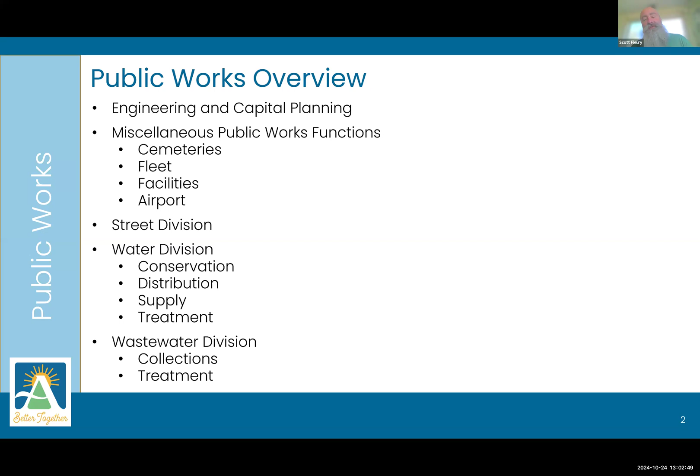So the first thing I wanted to talk about was engineering and support and planning and project development. One of the primary functions outside of budgeting that Public Works does in the engineering group is develop projects through master planning for the enterprise funds themselves.

So each enterprise—water, storm drain, streets, wastewater, even facilities—has a master plan, which is a guiding document. The master plan sets level of services. It sets goals and objectives for that enterprise or utility. It does a capital plan, provides components of maintenance for the system. It does a financial forecast for that enterprise as part of that. And how the city typically does master planning is the city council appoints a citizen community member group to work with staff and a consultant team to develop the plan itself.

So I'll give an example. In 2010, the city council appointed about a 10 to 12 member, I believe it was, Ashland Water Advisory Committee citizen group that worked on the 2012 water master plan. They worked from about 2010 to 2012, so almost a 2-year period, with consultant staff and city staff to develop that master plan, which then goes before the city council, and the city council reviews that master plan and finally adopts it.

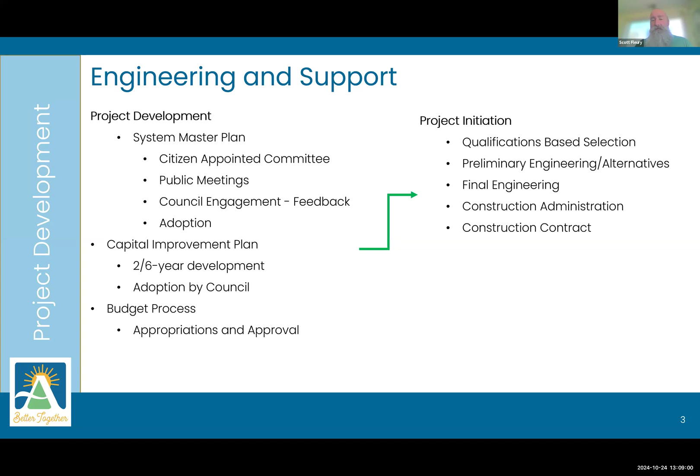So that's kind of the function of engineering overall for the city. It's one of the divisions in Public Works.

Now, some of the miscellaneous functions that Public Works does: we manage and maintain 3 historic cemeteries. The state has rules in place for how you maintain and take care of historic cemeteries. Public Works is also in charge of the fleet, so we maintain all of the equipment and all of the vehicles for the city itself.

One of the policy focuses over the last decade or so has been what's called a greening of the fleet. The city has been moving forward with electrification of its vehicles and some of its small equipment. Chainsaws, leaf blowers, lawnmowers and things like that have slowly become electrified and will continue to do so. Same with light duty pickup trucks and staff vehicles becoming electric or plug-in hybrid. That's been one of the policy directives of the city council.

Public Works also maintains all the occupied and unoccupied facilities for the city operationally. That's the community development building, City Hall, Briscoe School, the Civic Center, Grove, Police Station, 90 North Mountain, where Public Works and Electric, IT, and AFN are located. All of those city facilities are taken care of from a maintenance standpoint and also a custodial standpoint by city staff.

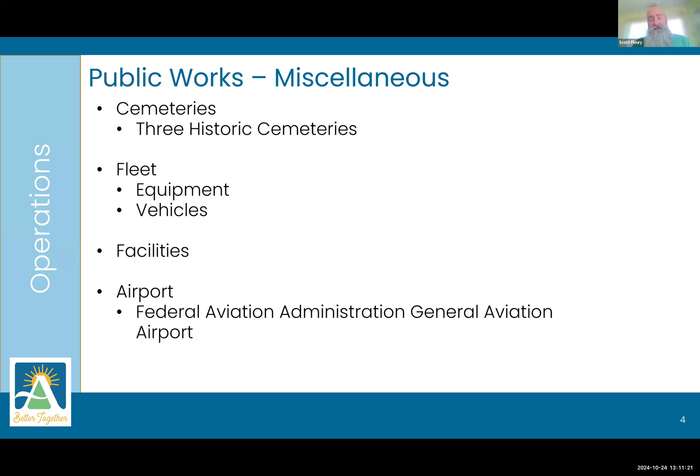The street division is obligated to maintain things within the public right-of-way. In most circumstances, that means things from curb line to curb line. When you leave the curb line and get into the park row landscape strip area and the sidewalk, per municipal code, that is the requirement of the adjacent property owner to maintain.

One of the primary focuses for street operations is pavement preservation. This includes going out and inspecting the roadways on a cyclical basis and developing what's called a pavement condition index, a rating of the condition of the roadway. They use that index to develop a strategy on what roads require what level of maintenance and when, so we always have an ongoing maintenance cycle of activities.

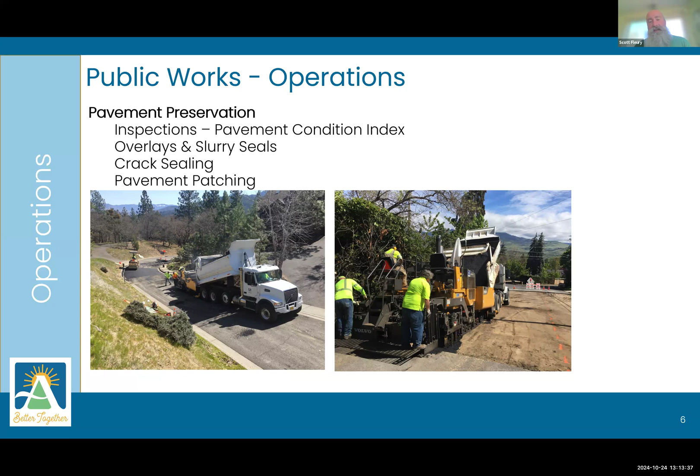Paving operations are seasonally dependent. These are things we do during the warmest part of the year because you need good weather to lay down pavement materials.

The other thing the street department does is a bunch of catch-all work. They do vegetation management. So if there are complaints about vision clearance at an intersection, like a tree blocking a stop sign, they go out on a code compliance related call and request the adjacent property owner, or do it themselves, maintain that vegetation so you have unobstructed views of intersections and signage.

They go out and repair potholes. They work with the police department and other agencies on special events doing traffic control. For all of the parades, they help assist and develop the traffic control and implement that.

They do all of the signage and striping markings throughout the city. In the city, there's well over 300 crosswalks, 30 plus miles of lane markings, and 100 to 200 plus miles of actual travel lanes, all of which need to be maintained with signage, striping, and marking.

When the winter season hits, they go out and snowplow the roads. We have a street sweeper that runs almost every day annually, and in fall when the trees start to leaf out, we run 2 sweepers most of the time to keep that debris out of the storm drain system primarily.

They also do grading on some of our unimproved roadways, roadways that aren't paved right now. They go out and grade and clean those up annually as needed.

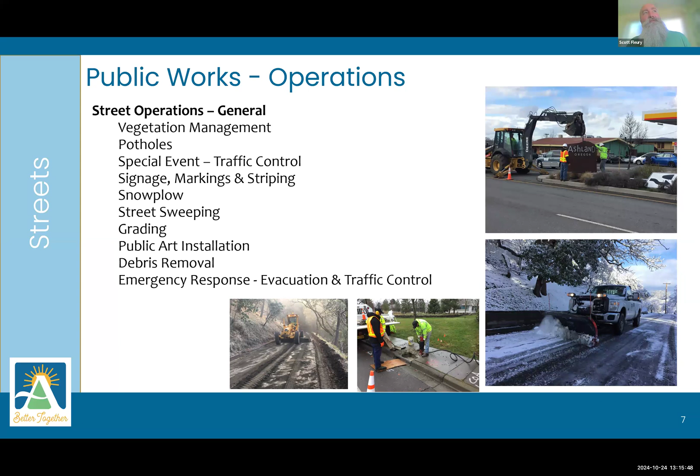Those are the primary functions of the street department for the city overall.

Now, the water system is broken up into 4 distinct divisions. And here's some drone footage.

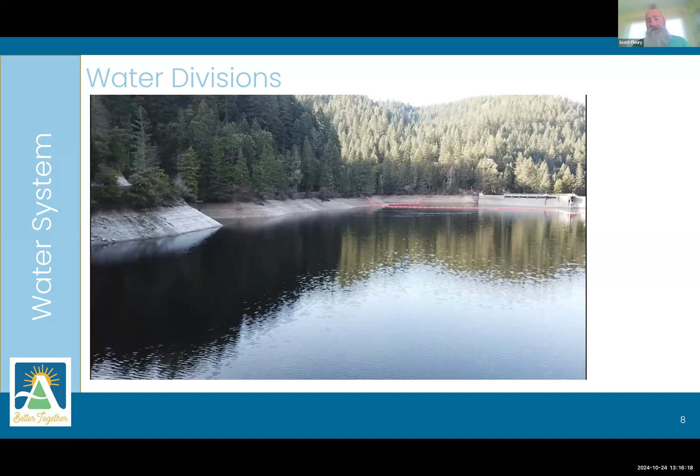This is Reeder Reservoir, the city's raw water storage reservoir, impounded by Hosler Dam. It's a little over 800 acre-feet of storage, about 280 million gallons that can be stored. The reservoir is fed by the east and west forks of Ashland Creek, and the Mount Ashland watershed feeds that through returning flows and also snowpack and snow melt.

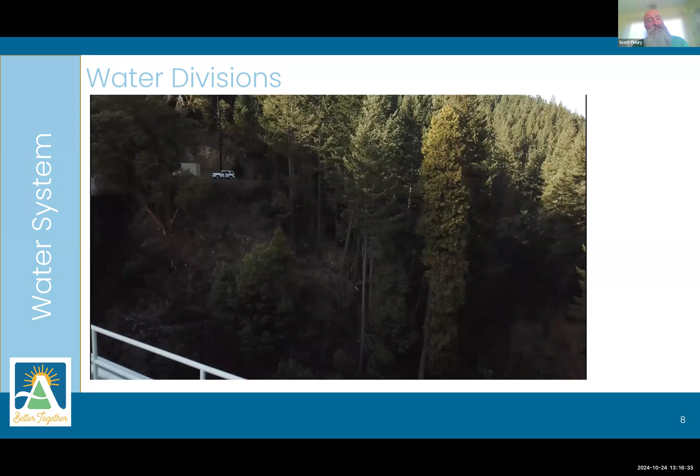This is Hosler Dam. It was constructed in 1928 and into 1929, when the reservoir was filled. It's 575 feet long at the crest and about 114 feet tall overall. A lot of people don't get to see it, but it's a pretty amazing place up there in the reservoir, so I like to show this video just so people get a scope and scale of what it looks like.

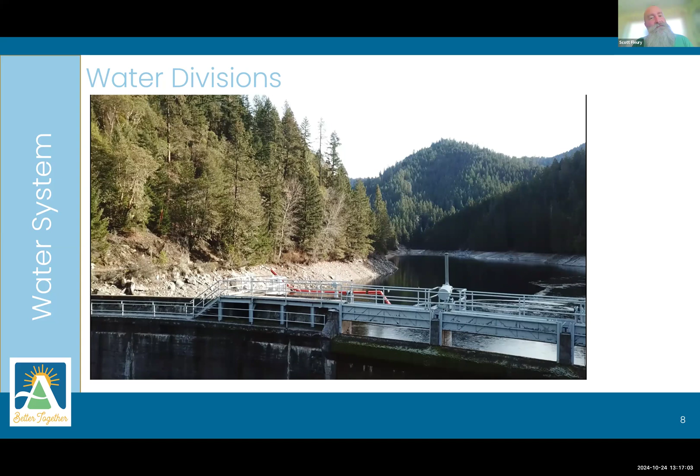From the operational side, one of the divisions for water is the supply division. That's where we manage and maintain Reeder Reservoir. We also manage and maintain our Talent Irrigation District source, so we have water rights with TID that can be used as a municipal right. In certain years with low water in the reservoir, the city can pump TID water up to the treatment plant and blend and treat it with Reeder Reservoir water.

Another supply component for the city is called the Talent Ashland Phoenix Intertie, or TAP line. This is where the city can take water from the Medford Water Commission through the TAP source. The city has 1,000 acre-feet of storage in Lost Creek Reservoir that diverts at the Duff treatment plant in Medford and can be sent to Ashland as another emergency resilient supply when we have water year restrictions or issues with the reservoir.

The staff who manage the supply system also manage the treatment plant, but they go up to the dam and the East and West Fork every day. They do a visual inspection of the facility, take measurements every day of the flow, and keep eyes on the facility itself. They manage the intake, where the raw water has an intake structure on the dam, and we take that water and send it down to the water treatment plant.

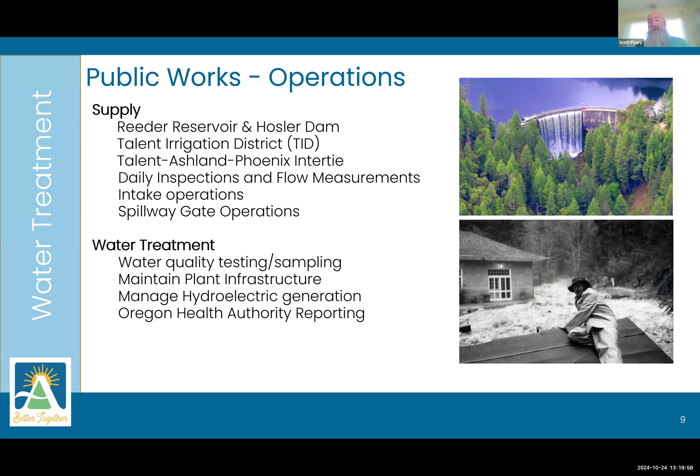The other division is the water treatment division. These are the treatment plant operators - a supervisor and 4 operators who staff the plant 365 days a year. They do all of the treatment processes, water quality testing and sampling, and maintain the plant infrastructure. They coordinate with the electric department to manage hydroelectric power generation, as the city does generate hydroelectric power at the facility. They also do all the Oregon Health reporting that the Oregon Health Authority requires as part of managing a water system and being a water purveyor.

Now we get to the water distribution side. We have well over 100 miles of underground pipe, multiple pressure reducing valves, multiple storage tanks of treated water, and multiple pump stations that make up the water distribution system. That group works on the pump stations, repairs leaks, replaces pipelines, inspects the tanks, manages the pressure reducing valves, goes out and tests the hydrants, and works with the fire department on fire flow testing when required. They read about 9,500 water meters on a monthly basis as part of their program.

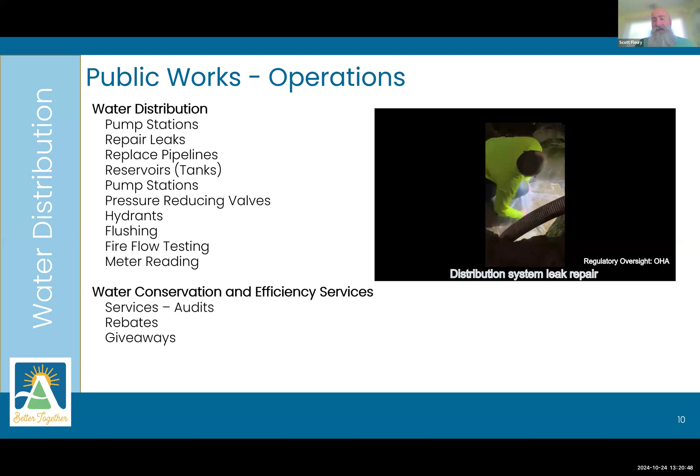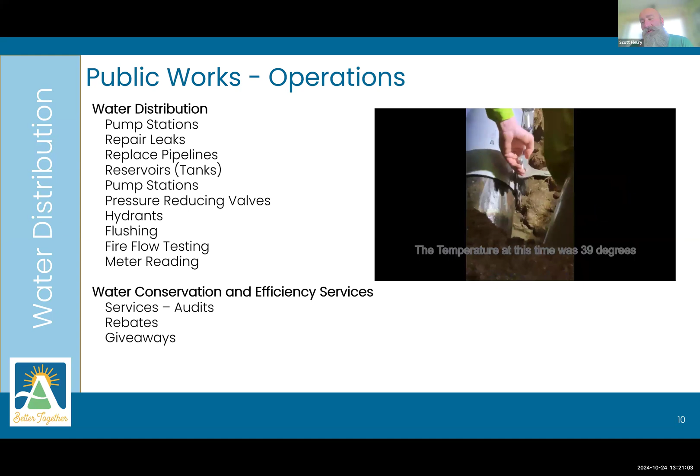And here's another short video. Water leaks never happen at an opportune time, you know, a Tuesday morning at 10 a.m. This is the middle of the night in December - it's freezing cold out, and one of the members is down in a muddy ditch, blocking water out of this leaking pipe while they put a repair band on it. It's been a couple years now, but there were two years in a row, I believe, where there was a leak on Christmas Eve or Christmas Day, where they were out doing repairs.

They've been lucky the last couple of years, fortunately.

Lastly, the other division in the water department is the Water Conservation Division. They do audits, both indoor and outdoor efficiency audits. So if you're interested to understand your water usage and how you can reduce it, both indoor and outdoor, you can call our conservation services group and they'll schedule an appointment to audit your water usage and give you ideas and programs to follow through with to reduce your usage. They also do a lot of rebates.

We have our lawn replacement program, and they have other rebates for toilet replacement and things like that, that you can coordinate and work with them on to get rebates.

They also do giveaways and public education and outreach. They put on gray water seminars and work with the Southern Oregon Landscape Association to look at irrigation efficiencies that can be employed regionally. They work with the Parks Department on water conservation measures, and they also review private development landscape plans as part of the development process, recommending changes where they see opportunities to gain efficiencies.

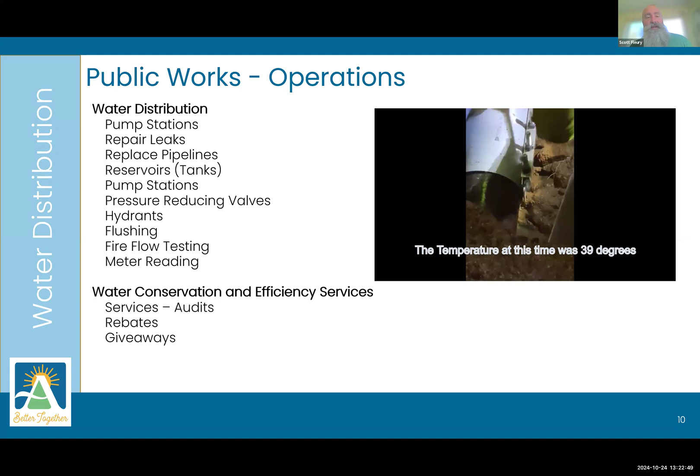So lastly, we'll get to the wastewater side of things, starting with wastewater collections. Once you flush that toilet or run water in the faucet, they take it from there. The collection system is well over 100 miles of pipes, hundreds upon hundreds of manholes, and lift stations that lift gray water and brown water up and over hills based on the city's topography. They repair cracked or broken lines.

They replace and/or upsize sewer main lines, and they're required regulatorily to inspect the system. They have a camera truck that drives around and visually inspects, via camera, 25% of the system annually.

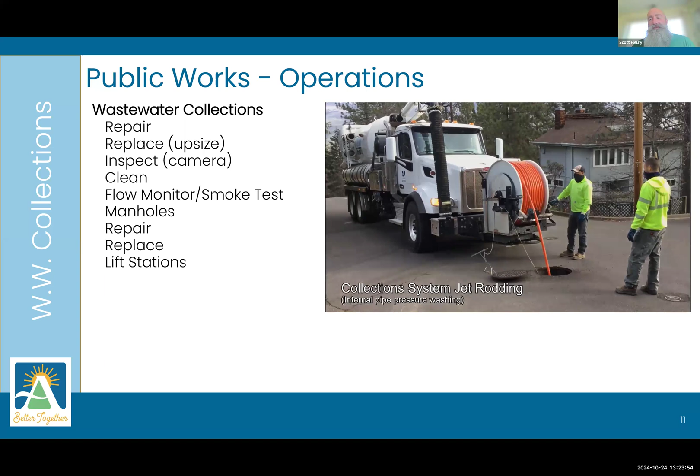They also do special cleaning of the system. This truck here is a jet rodder, basically a pressure washer with a special nozzle head that they send down the sewer to clean it. It helps get fats, oils, and greases that are stuck to the sewer pipes out as part of their overall process.

They manage the lift stations, going out to check all of them every week to make sure they're working correctly with no major clogs or issues. On the operational side, streets and water generally work Monday through Friday, but each division has an on-call component, so anything that happens after hours, they'll respond to as part of an emergency or repair or something that comes up.

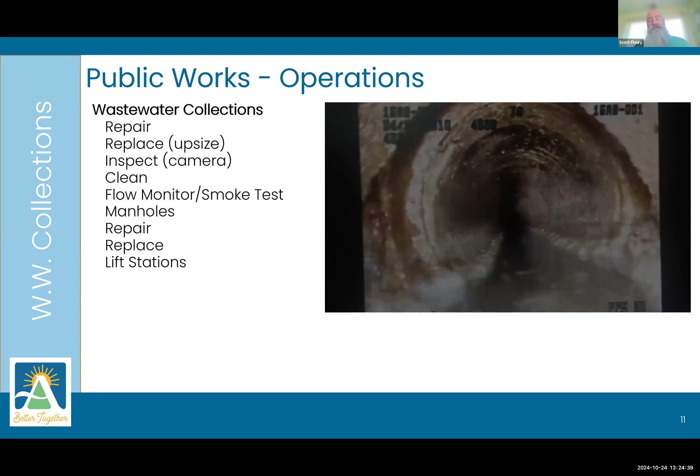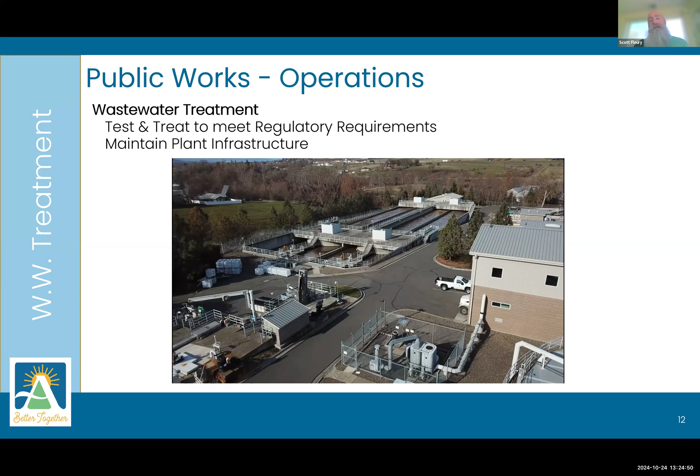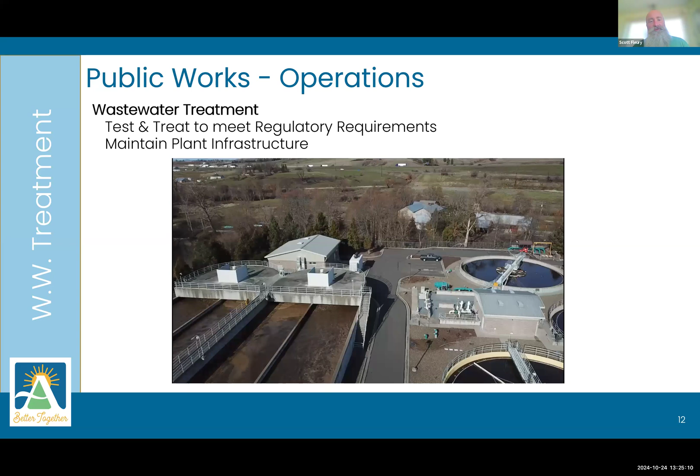Once it's collected, it makes it to the city's wastewater treatment plant, which treats the water to Department of Environmental Quality regulatory standards. There's a supervisor and 4 operators at the wastewater plant, staffing it 7 days a week, 365 days a year, managing that infrastructure. The plant was formally and fully upgraded in the late 90s into the early 2000s because of the changing regulatory scope and nature.

There's always ongoing maintenance that needs to be done. You might be aware that we recently relocated the outfall, where the effluent leaves the plant, from Ashland Creek to Bear Creek because of regulatory requirements. We're also in the process of meeting thermal limit criteria for our effluent wastewater through riparian restoration. Throughout Ashland and other locations, we have a contractor planting trees, which offsets solar impact into the watershed and helps us meet the temperature criteria established by the Department of Environmental Quality.

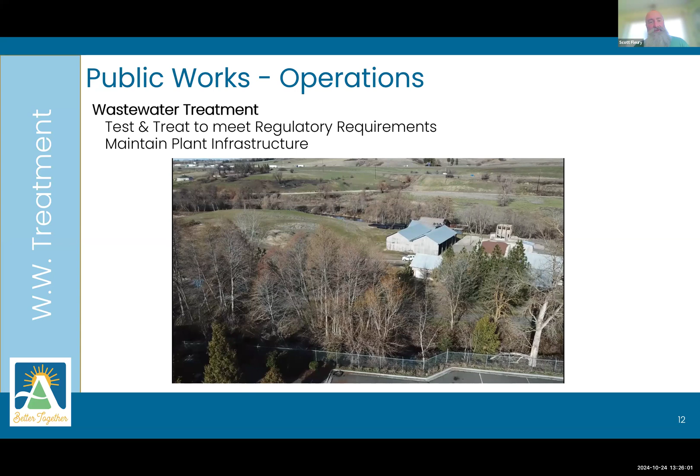And really, that's kind of a high level overview of public works. I know the last couple times I've done this, everyone's been more interested in asking a bunch of questions, so I try to get through the general overview and move on to the Q&A phase of everything.